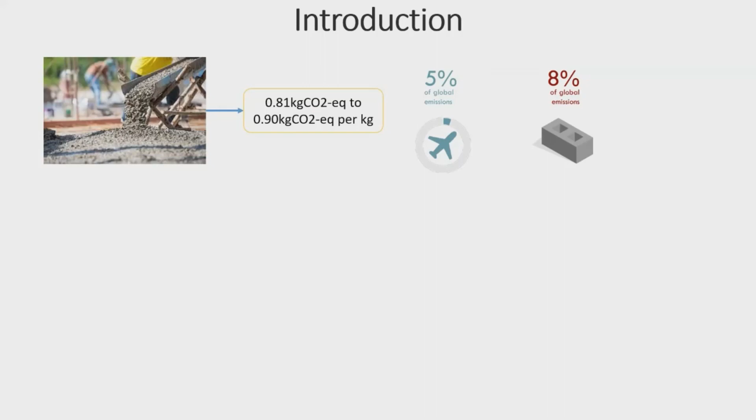We all know concrete is the most abundant composite material available worldwide. Its constituents are mainly cement, water, and aggregates as fillers. Of these materials, cement has the heaviest environmental impact, with a carbon footprint of up to 0.81 to 0.90 kilograms of equivalent CO2 per kilogram of cement produced. In a global context, this means cement production is roughly 8% of global emissions, while commercial flight represents 5%.

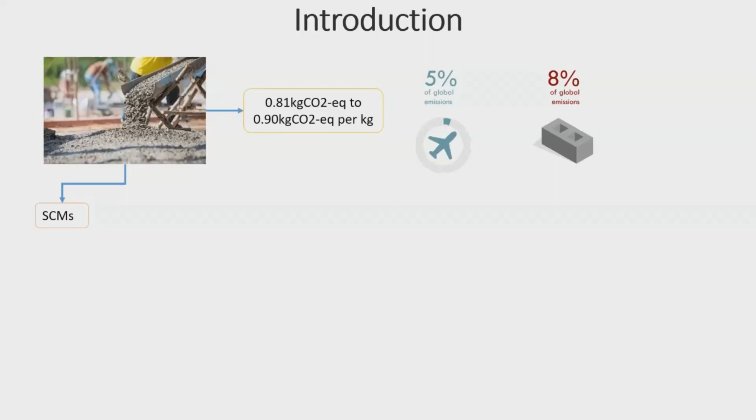To better deal with this environmental issue, the implementation of SCMs has been proposed. In this study, calcinated biomasses from 300 to 1000 Celsius are reviewed under the term biochar. Biochar is the residual ash obtained after thermal conversion of biomass, which is basically pyrogenic residual waste.

For the present study, 379 items were considered initially, but after the selection criteria and screening process, it was narrowed down to 20 items.

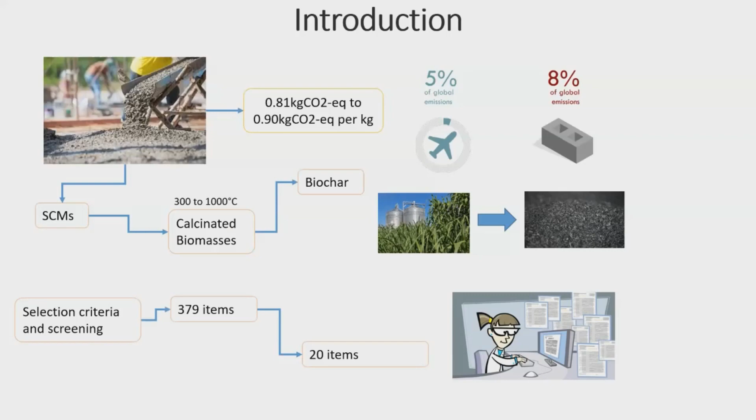One of the sections reviewed is biochar as a functional material, for which its physical and morphological properties were assessed, as were its chemical properties. Under physical and morphological properties, we have porosity, particle shape, surface area, and density, as well as transport properties, workability, and filler effect. On the chemical properties side, we reviewed elemental and chemical composition, its relation with degradation and stability of biochar, pozzolanic reaction, and pH.

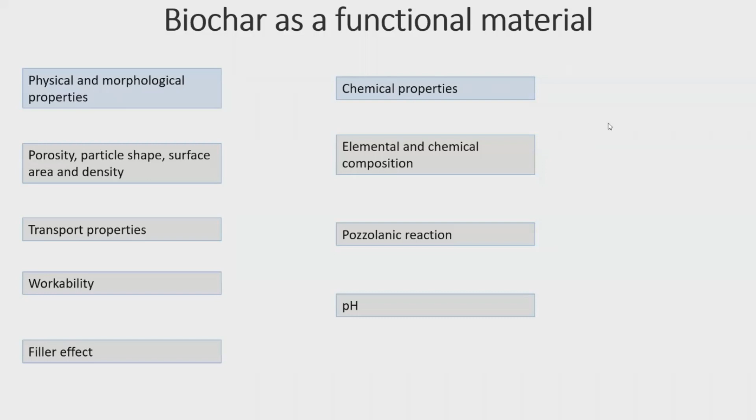Under porosity, particle shape, surface area, and density, we identify biochar as a pyrogenic residue of biomass thermochemical conversion. This is a process where oxygen conditions are limited, during which water evaporation occurs first, followed by the release of volatiles, and finally the setting of porous carbonaceous ashes.

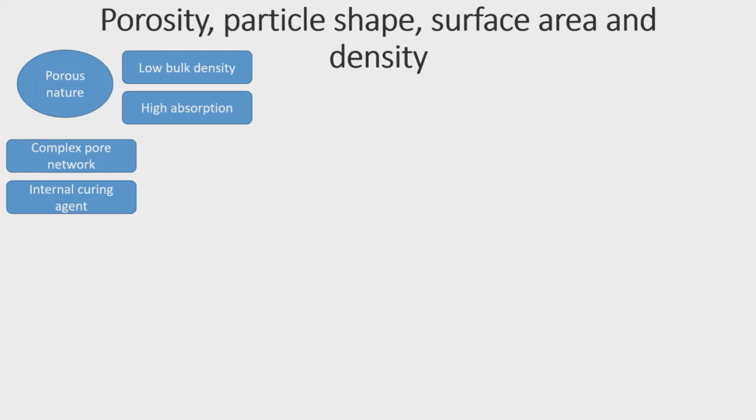While porosity, surface area, and density are important properties for cementitious composites, these properties are linked. For example, density is related to porosity: as porosity increases, density tends to decrease. The same thing happens with surface area: when particle size decreases, surface area tends to increase.

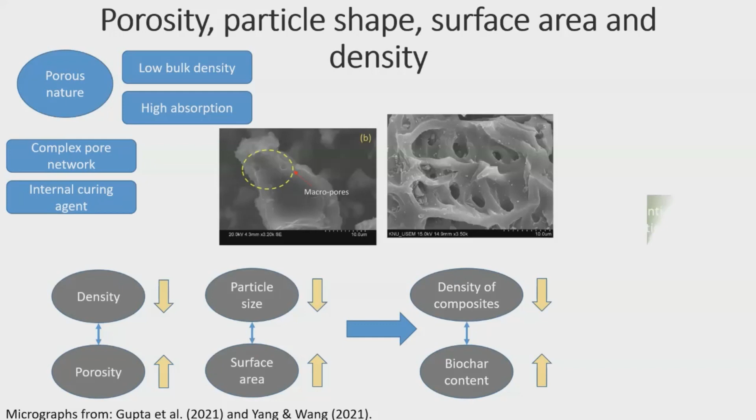In the context of biochar, which is a porous material and tends to have lower densities, depending on the calcination temperature, it tends to have lower particle sizes on the lower end, which develops composites of lower density. This is heavily affected by the ratio of biochar replacement. However, this is not all bad news, because biochar cementitious composites might pose as potential applications as lightweight composites, which are energy efficient.

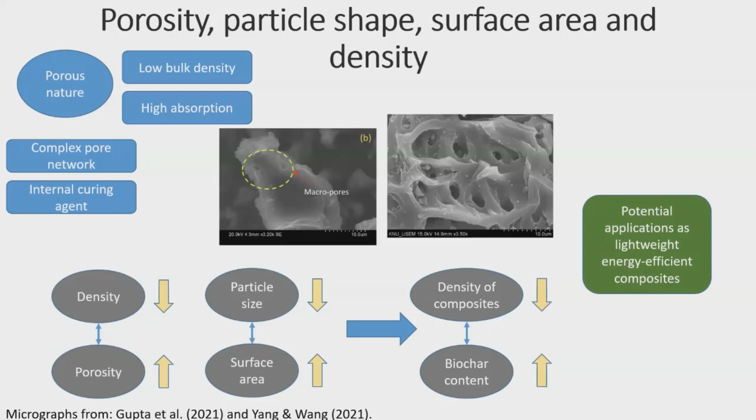In the context of transport properties and workability of biochar composites in cementitious composites, several transport properties are important. To name a few, we have water absorption, permeability, thermal conductivity, electrical resistivity, sulfate resistance, and chloride diffusion.

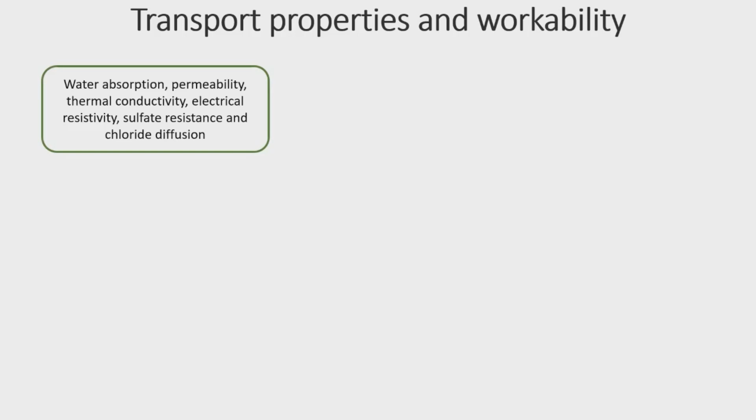As we have exposed before, biochar presents a complicated pore network, regardless of the biomass feedstock, which contributes to diffusion effects and entrapment of contaminants. Its low thermal conductivity and high porosity allow it to be considered as an insulating agent.

What is a thermal insulator? Biochar composites are great thermal insulators because of their high porosity, leading to a decrease in thermal conductivity. This is an important property when developing lightweight concrete composites. A thermal insulator is a material that does not conduct heat well, which derives in higher energy savings and thermal efficiency.

Another important transport property which affects workability is hydrophilicity, or water uptake and absorption. The more water it absorbs, it tends to absorb water and then eventually release it, increasing the ratio of voids and thus decreasing workability because of this water absorption.

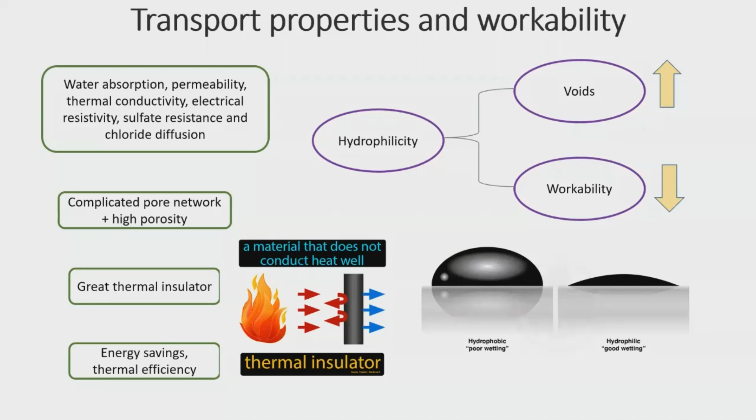In terms of durability of cementitious composites, a few important properties are electrical resistivity, sulfate resistance, and chloride diffusion. Free chloride ions are a major threat to reinforced concrete due to the depassivation effect, leading to corrosion and the formation of solids on the surface of the reinforcement. These volume increases derive in internal stresses and the eventual cracking of the concrete layer, thereby reducing its service time.

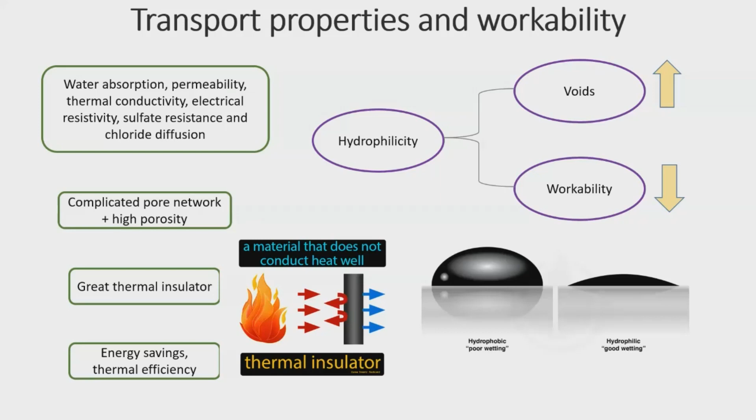The findings of the present review suggest that biochar addition helps preserve strength in an 8 to 11% proportion even after 120 days of exposure. In the case of sulfate expansion, they experience a reduction in the order of 60 up to 68% in contrast with reference. Both cases correspond to a 1 to 2% substitution of wood and rice husk biochar on a weight-to-weight basis.

Not all biochars tend to react with cement in a pozzolanic way or in a latent hydraulic way, and might pose as a strong candidate for the filler effect, which is the filling of voids, with these particles acting as nucleation sites.

Filler effect is characterized by being inert and non-reactive on its own. However, it favors the development of a more densified microstructure. This happens through two mechanisms. The first, the filling of interstitial spaces between cement grains, as we can see in the pictures, promoting densification.

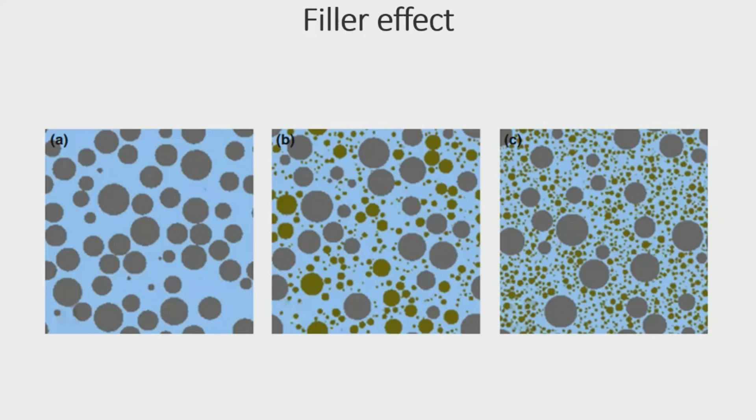Secondly, an increase in the surface area available for the nucleation of hydration products such as CSH gels or Portlandite, CH, among other hydration products. This is where elemental and chemical composition are important, because we are looking for high contents of silicon dioxide and calcium oxides. This is mainly because these two oxides help to determine if a material has potential as a pozzolanic material or a latent hydraulic material. Otherwise, it might as well act as an inert filler.

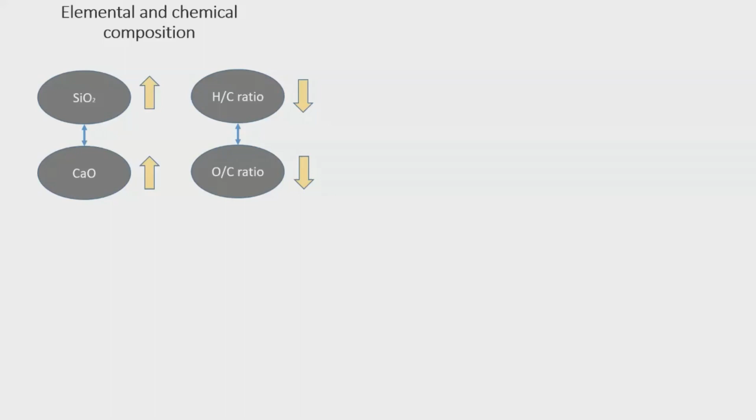Another important aspect of biochar worth mentioning is its HC ratio and its OC ratio - its hydrogen to carbon ratio and its oxygen to carbon ratio. We expect low values for these two ratios since these describe the stability and longevity of biochar inside the cementitious matrix. According to research literature, an OC ratio of 0.45 has an estimated service time of 100 years in an inert nature and without degrading itself.

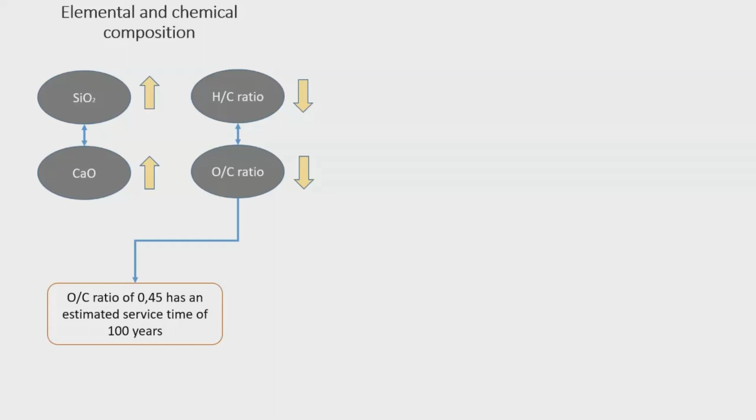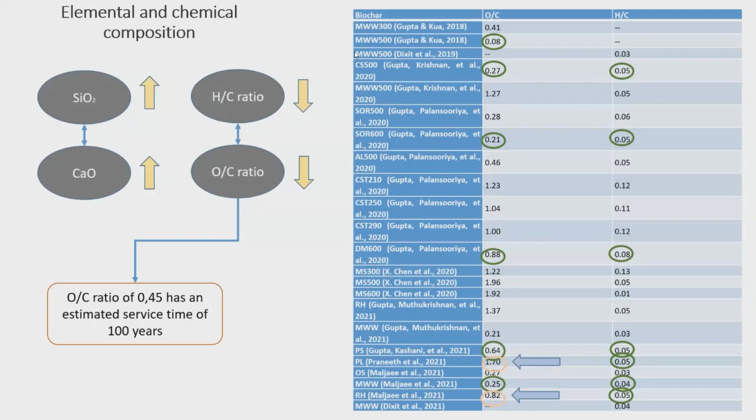Pozzolanic reaction and its relation to mechanical properties are of utmost importance for biochar composite materials. As has been explained before, the reaction between silicon dioxide and calcium hydroxide with water produce hydrated calcium silicates. In this context, when any SCM, any supplementary cementitious material, has amorphous silicon dioxide, these oxides can react with the

free and available calcium hydroxides available in the hydrated cement matrix, thus leading to the further production of more hydrated calcium silicates. Why is this important? Because increasing these calcium silicates derives in further increase in density, and other hydrated products like CASH or AFM phases, thus developing higher strengths in cementitious composites.

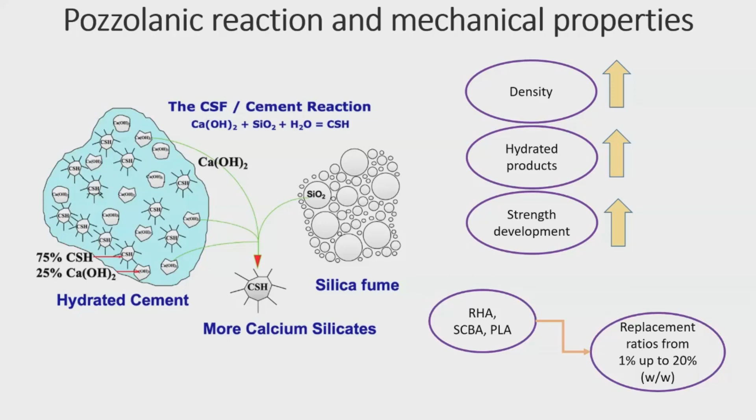The second thing would be dosages of over 10 to 20% on a weight basis, demonstrating to increase compressive and flexural strengths. Incorporation of biochar reduced the composite density. However, it acts as an internal curing agent.

As has been mentioned in this review, this hydrophilicity property of biochar allows for this material to gradually release water to the cementitious matrix, thus hydrating the cement grains and producing even more hydration products. Dosages of 2 to 8% of cement replacement enhance properties such as water absorption, capillary porosity, and even decreased water penetration due to saturation, which is an effect linked with the filler effect.

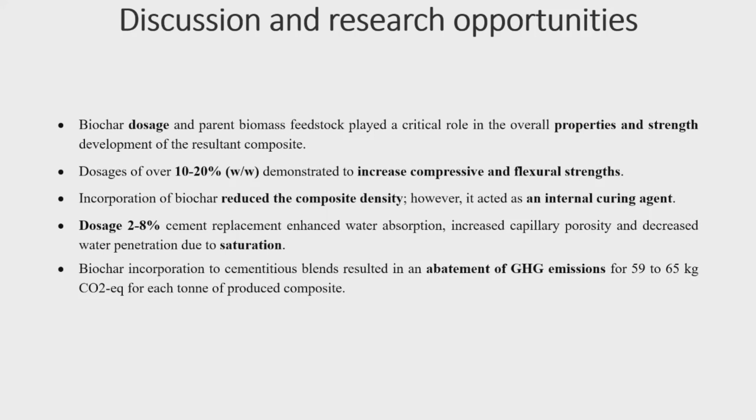For further research opportunities and research voids yet to be filled, to the best of our knowledge, there are no studies which statistically correlate the thermochemical conversion parameters such as temperature, heating rate, residence time with certain properties of biochar related to durability in cementitious composites such as elemental and chemical composition, OC and HC ratios, pH, density, porosity, surface area, and mechanical properties, to establish the statistical significance of any of these properties in relation to long-term expectation of biochar cementitious composites in terms of durability and even acting as carbon sinks.

The second great opportunity that was identified is that, notwithstanding the lack of research about this particular subject, it can be inferred that biochar amended composites pose as promising materials for the development of novel cement-based materials, such as pervious concrete, water purification, heavy metal removal, soil stabilization, bacteria carriers, heat, and sound isolators, among many others, while simultaneously acting as carbon footprint reduction agents in cementitious composites.

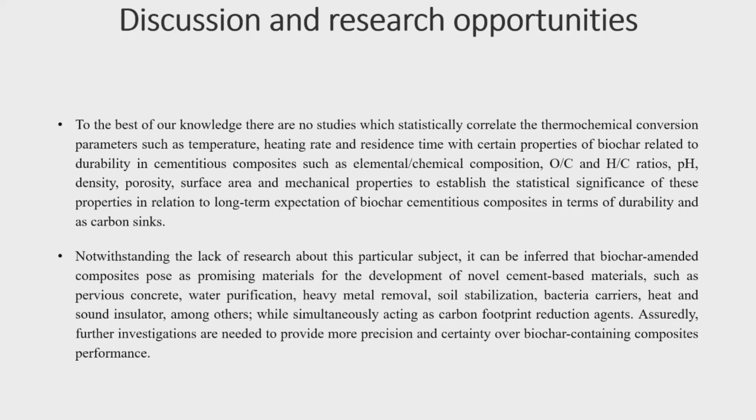Assuredly, further investigations are needed to provide more precision and certainty over biochar containing composites performance. Well, with the selected references from the extended review...